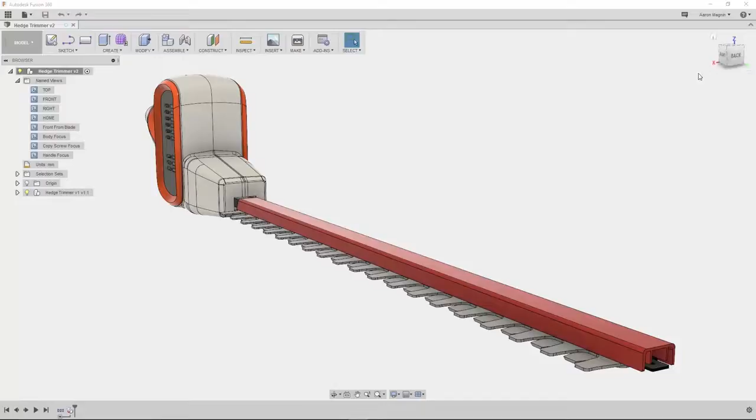January is bringing some amazing stuff to Fusion 360, and as we work along with this hedge trimmer design, we'll show you some of our favorite things. As I use the view cube to adjust the views and get accustomed to the device, you'll probably already notice that the global X, Y, and Z axes are now clearly visible here. This will help immensely because, as you know, directions can get pretty arbitrary pretty fast. With that, let's set out on our design task.

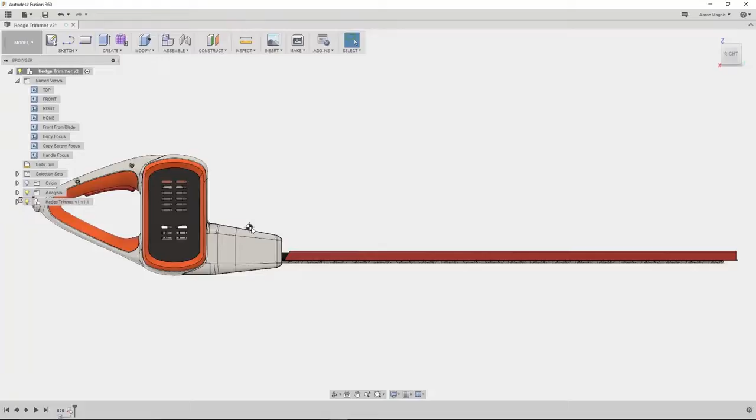And at this stage, we want to ensure the center of mass is located in such a way as to balance it as much as possible. The new center of mass callout should help with that. Once turned on from the inspect dropdown, we'll now visibly see where the center of mass is. Right now it's a little forward for my liking, so let's explore how we can improve the situation. Let's focus on the heaviest of items, the mechanical system.

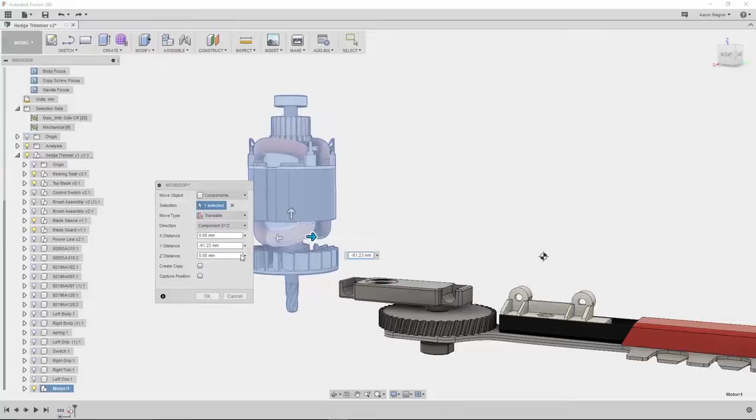What I want to test here is how big a difference moving the motor back might affect the center of gravity location. Accessing the move command, you'll notice a handful of differences. We'll cover these as the video goes on, but for now, we'll select to move the component using a new move type, translate. While we've had the ability to translate from the move command, using this new option helps declutter the manipulators. In addition, I'll leverage another new option here, the toggle to capture the position. This adds a feature in the timeline, making later edits easier.

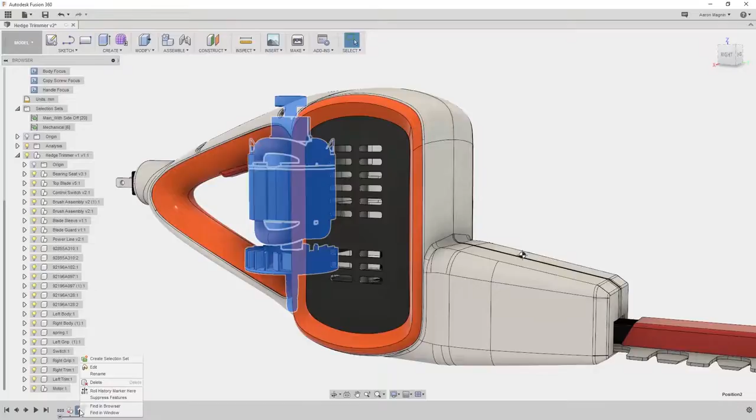As I click OK, turn your attention to the associative center of mass as it updates. As expected, it moves back, but not enough considering all the design changes a move like this would require. So we'll delete the capture position feature to return it from whence it came, and explore another change. The counterweight might have similar effects, and in looking at the handle, I see some prime real estate where we could add one. But to maximize the effects, let's move the ribs to accommodate a larger counterweight.

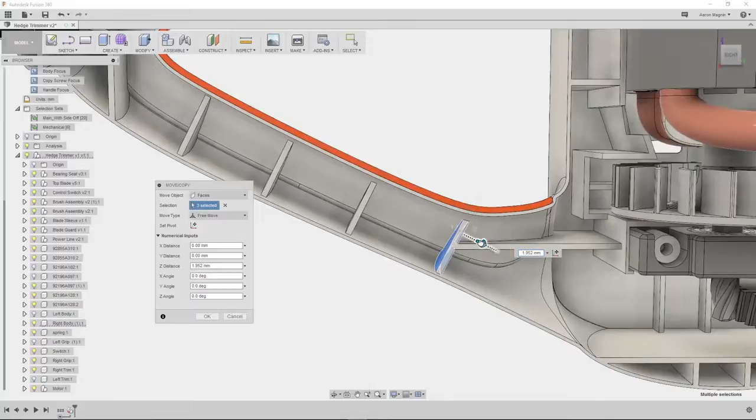I'll pre-select the faces and hit the M key on my keyboard to start the move command again. Because I pre-selected faces, it automatically takes me to one of my favorite new move features, Move Faces. This existed prior, but only when you weren't capturing design history. This new capability will allow me to easily move and rotate these two ribs to my liking, and the best part is that with history turned on, it captures the move in a feature so I can go back and edit it later. Because I don't want the weight to shift during use, I want to make sure it fits snugly against the oddly shaped walls.

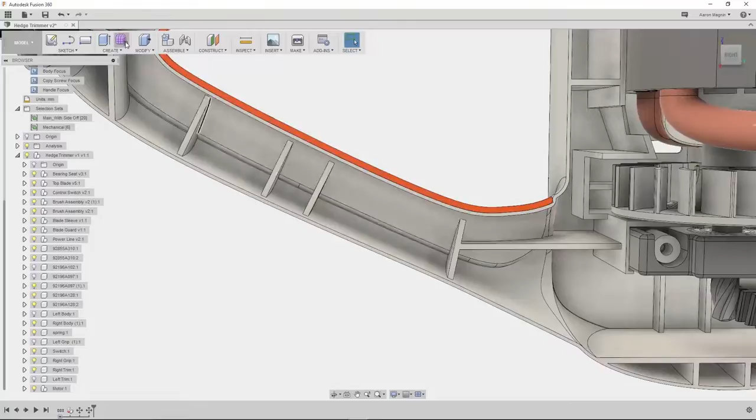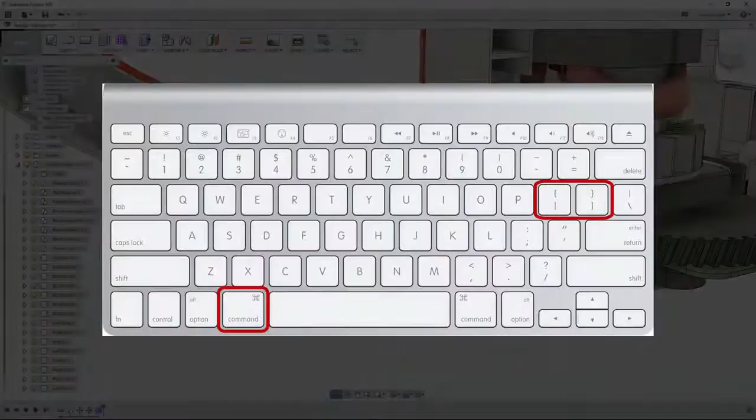To ensure I replicate the walls, let's jump into the sculpt mode and convert these faces. The new convert dialog box feedback makes it clear what input Fusion is expecting. We'll jump ahead to the finished sculpted shape, and now I need to close off the ends and make a solid out of this. To jump to the patch workspace, I'll use the Control or Command bracket key to switch between workspaces. This keyboard shortcut will allow me to stay focused on what matters, my design, rather than digging through those menus. We'll patch both ends and stitch it together to make a solid.

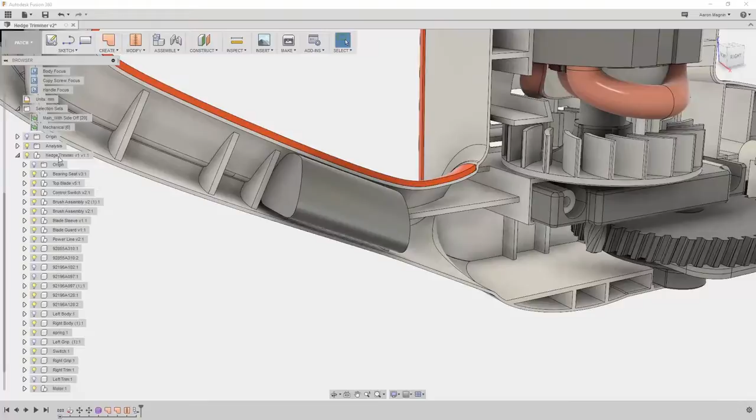Then convert the body to a component. Let's see how effective this is to the center of mass. I'll suppress and unsuppress the counterweight and notice how this improves the balance of the device. If I'm now done with the center of mass, we can turn it off from the analysis folder.

On the front of the hedge trimmer, it appears I'm missing a screw that attaches the blade sleeve to the body. To fix this, let's first measure the distance the new screw will need to be offset from the existing. As I access the measure command by hitting I on my keyboard, you'll see a new option here. It's related to the snap points, which will be on by default. Snap points are all these little guys you see on this face I'm about to select from. While these can be handy when you want them, when you don't want them, they can be quite annoying. Let's turn them off, then continue measuring the distance.

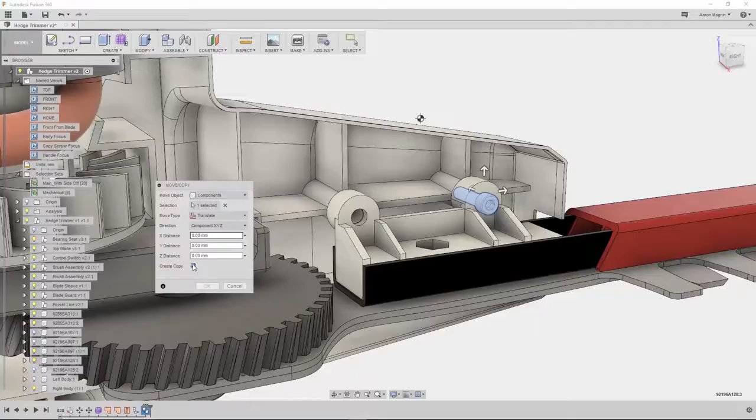35mm is the offset, so let's use that now as we use the move/copy command. I was trying to glance past the new copy part of the tool when I used it earlier. Anyway, I'll select the existing screw, toggle the translate option once again, but this time I want to make sure to toggle on the create copy option before I key in the measured value. This is one of those times the global triad comes in handy.

And although I've highlighted about 10 new options in the move copy command, I still haven't covered all of the new stuff. Check out the always incredible What's New blog by Keqing. You'll be glad you did.

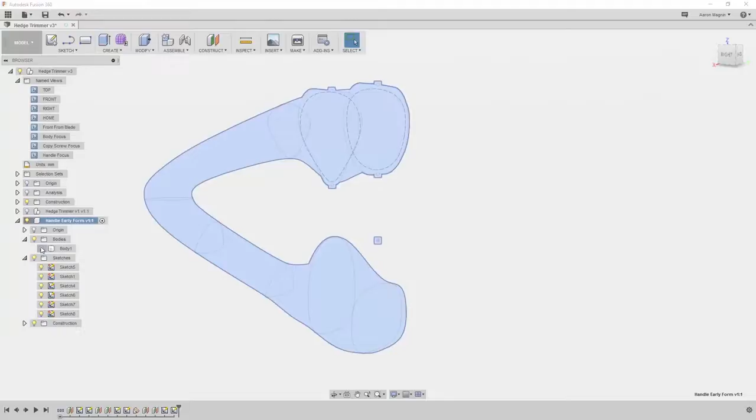This is looking pretty good for now, but let's turn our attention to the handle shape to highlight some other new options. Here I have a model that demonstrates the shape we eventually settled on, because I want to explore some changes. Using Loft to make a shape like this is a great option. When I turn on the Loft, a notable option here is Chain Selection. New to this release is the fact that it will remember the options data as additional Loft features are added.

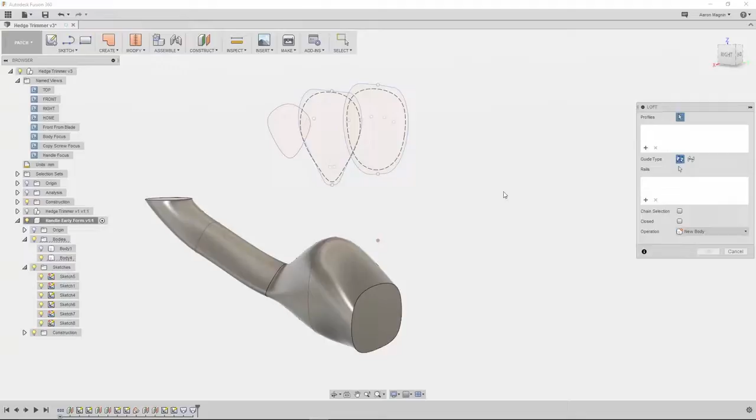This is significantly more important when you go to use a loft in the patch workspace, which again, I'll use the command brackets to switch to. The chain selection option here will, by default, be turned off. This is the more desirable option, as you typically use the patch environment to gain more control over individual faces or items. The next profile I'd like to use is one single entity, however. So let's adjust the sketch to give me more control.

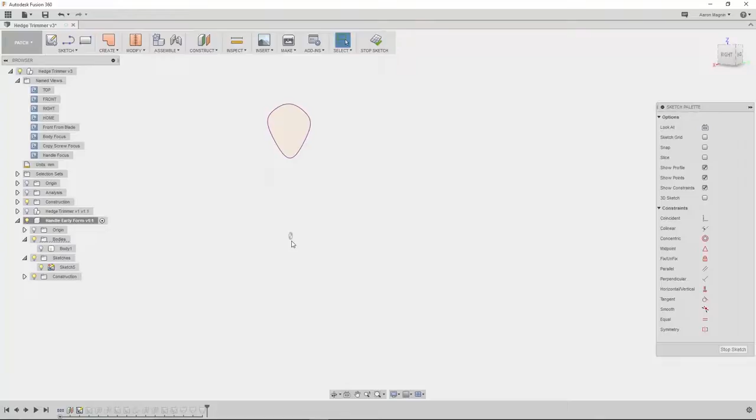As I go to edit the sketch, I want you to note this, the sketch origin, which will always be visible. This is incredibly handy because without it, sketching even a line to intersect the shape would be difficult to locate. With the origin always visible, I can make the end coincident to the sketch origin and that line is properly positioned. These little things can sometimes result in huge improvements. Now, the patch loft can continue.

In this update, we have improved the viewing experience while in work offline mode. Now, while in offline mode, the project and folder structure remains consistent to the look and feel while in online mode. First, Fusion 360 has a period where it will cache files that have been opened locally. These are the files that can be opened while in offline mode. To control the time for this period, go to your name, then Preferences, then change the offline cache time period.

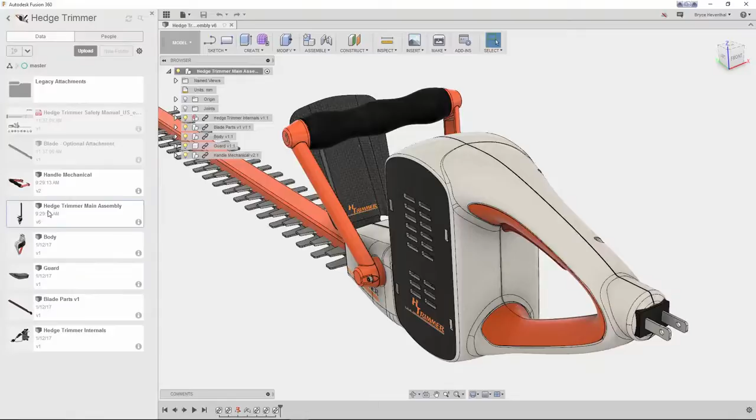Now, when you go offline, you will see the same project and folder structure as if you were online. The main difference is files that are cached locally and can be opened and edited while offline are going to be lit up. Files that are gray are not cached locally. You will have to wait to be back online to open these files. Don't worry, we will be improving the offline experience even further. Make sure to check out the Fusion forecast in the Fusion 360 blog to see what else is coming for work offline mode.

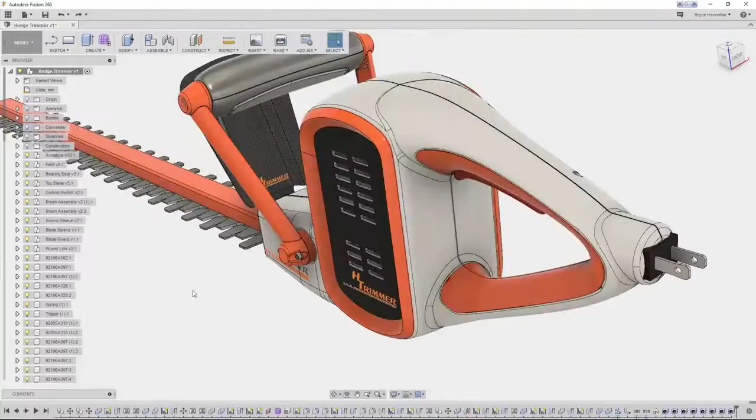Next, in the January update, we have several big enhancements to hit the rendering environment. First, let's open up the Appearance Library. Now, we can search the Appearance Library. This will search the Fusion 360 appearances, My Cloud appearances, and My Favorites.

Speaking of cloud appearances, in this update, we now have cloud appearances. Simply modify any of the appearances in the project and select Copy to My Appearances. The list of My Appearances is sorted just like the Fusion 360 library and is searchable. Now you will be able to sign in to any machine using your Autodesk ID and access your appearances on any device.

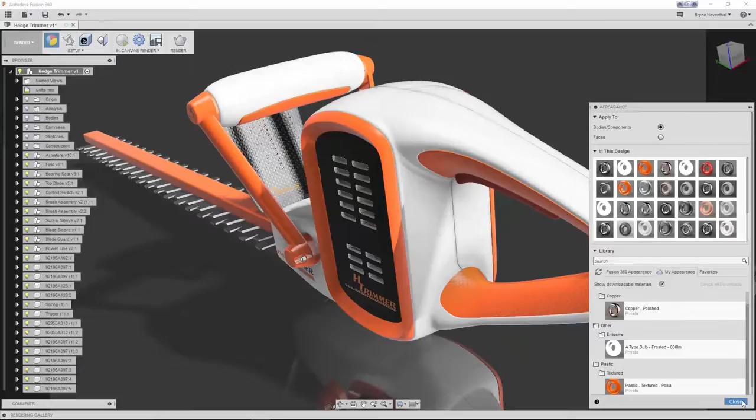Not only did the Appearance Library see some big enhancements, but the in-canvas rendering also saw some major improvements. First, let's start the in-canvas renderer. And notice the bar at the bottom right corner that specifies the elapsed time and number of iterations. Let's open up the settings. There is a new lock view checkbox.

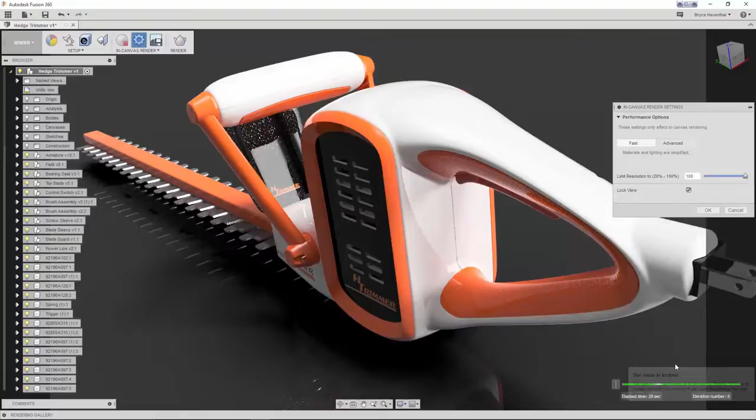Previously, if you accidentally panned, zoomed, or rotated while you were rendering in canvas, it would reset. Now, we can save ourselves from screaming at the screen by locking the view. While the in-canvas render is on, Fusion 360 will not let you change the view. Notice that I'm rendering in fast mode. Let's go ahead and switch to advanced.

Notice the bar at the bottom changes. Finally, the bar at the bottom has different quality settings for excellent, final, and infinite. Use the arrow to place on any of these or anything in between. The renderer will stop once it reaches the specified quality setting.

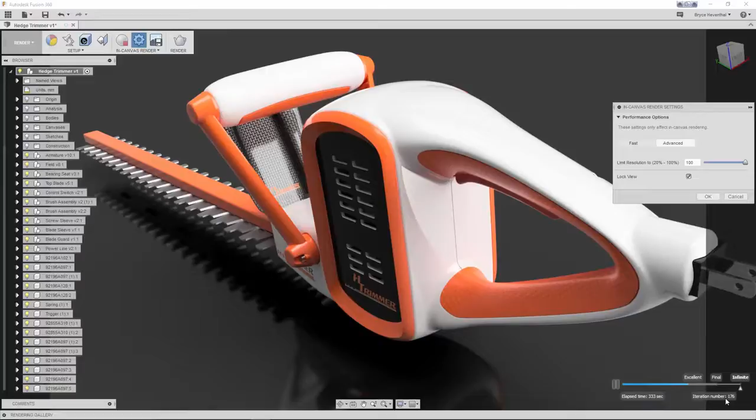Now, let's switch over to some of the nuggets that hit the CAM environment. First, we have added cloud assets. These assets will be stored in the cloud, which means no matter which computer you sign into Fusion 360 on, you will have access to these assets.

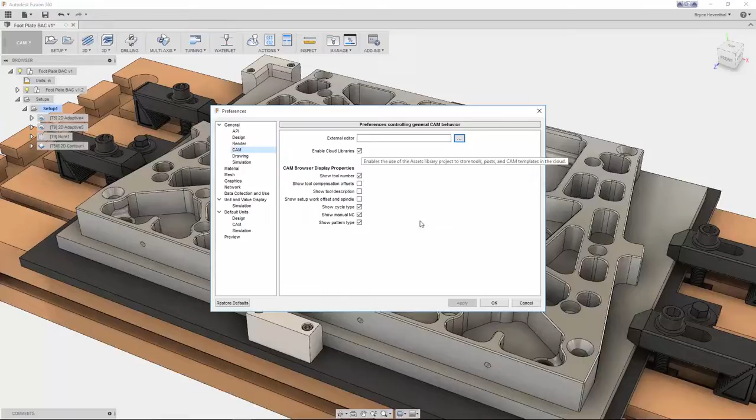Turn them on by going to the Preferences, CAM, and select Enable Cloud Libraries. Now there will be an Assets folder located in the Data panel. Currently, the assets support CAM templates, CAM tool libraries, and CAM posts. Let's start by adding some CAM tool libraries.

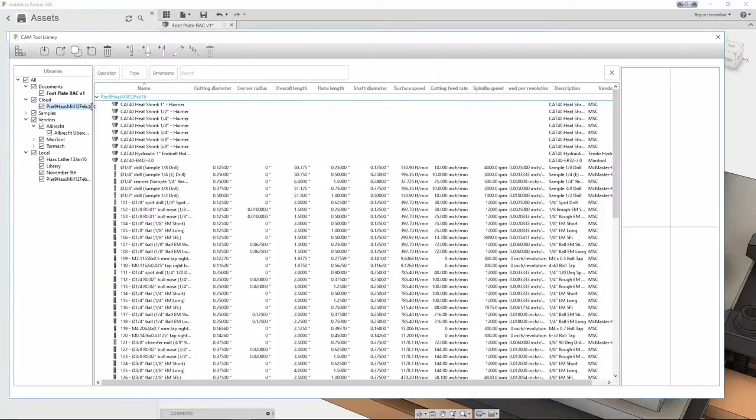I'll go ahead and start by opening up my CAM tool library. There are several ways to add to your assets. Tools that are stored in the cloud library will appear in the assets. One way to add is to import existing libraries into the cloud library. Notice after a refresh that the library is shown in the data panel.

Another way is to create a new library in the cloud library, then add your favorite tools from other libraries into that folder. In addition, we can upload straight into the data panel using the upload button.

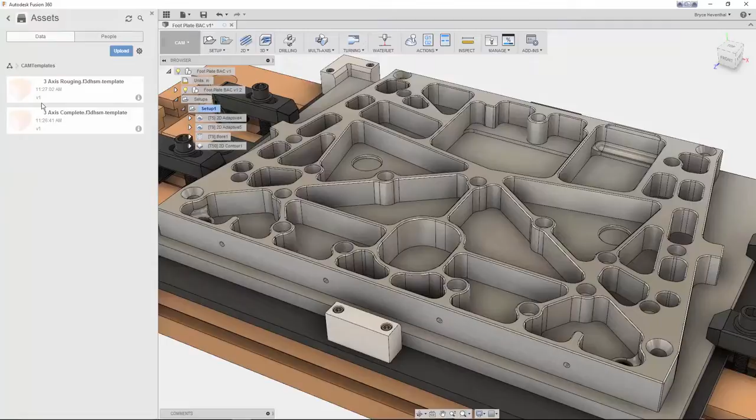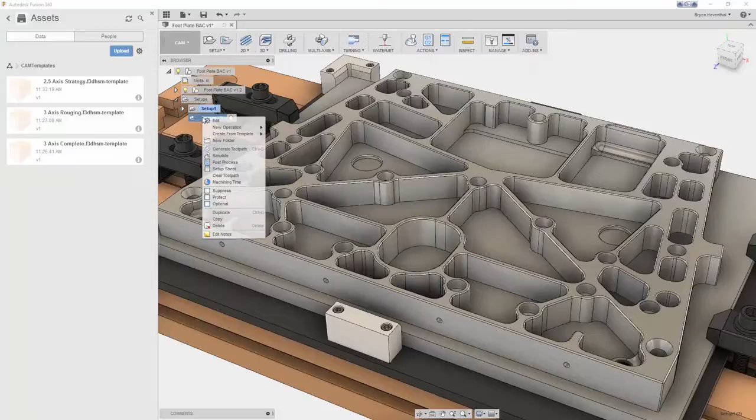Now let's switch over to CAM templates. Now when you create a CAM template, it will be stored in that assets folder. Simply select your favorite collection of toolpaths, right-click, and select Store as Template. Now, no matter what machine you are on, you can use your favorite CAM templates while you are programming your part. The CAM environment is the first place we will be seeing assets being used. But spoiler alert, stay tuned for future updates where maybe other environments take advantage of these cloud assets.

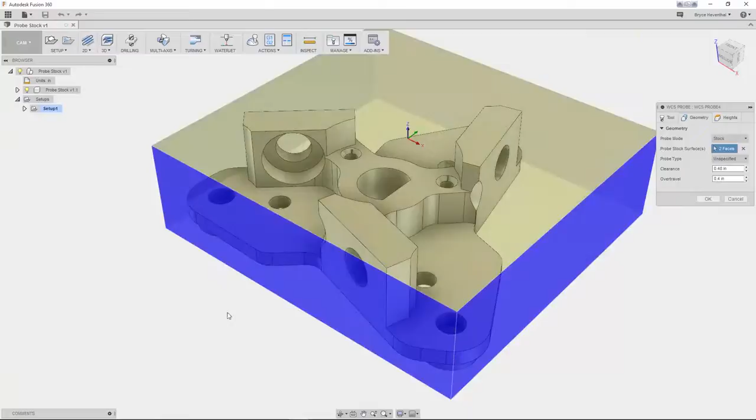Now let's switch gears to some probing. In this update, we can now probe the stock. In this example, we want to probe the center of the stock. Selecting off the model geometry would be difficult to locate the center. Instead, we could switch the probe mode to stock. Now we can select on the yellow stock preview to probe the center of the stock. The probe type will change automatically based off of this selection.

Next, let's create a new probe feature. This time we will use the model probe mode. Let's probe this middle surface. We are trying to locate the surface of this part, but if we machined out this center pocket already, the probe would have nothing to touch off. Instead, let's enable Use Selection Point. This will use the location where I clicked on the surface as the probing location.

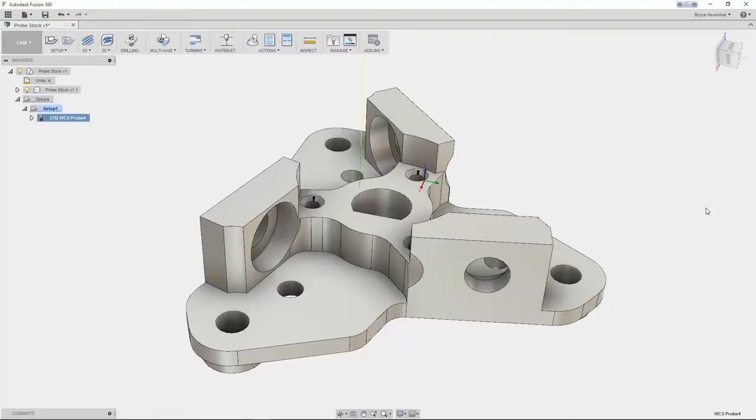Now previously, when creating a drilling operation for several different holes, Fusion 360 has this awesome checkbox to optimize the order of the holes that are being drilled. Well, in this update, we added this optimize order option to the thread, bore, and circular toolpaths.

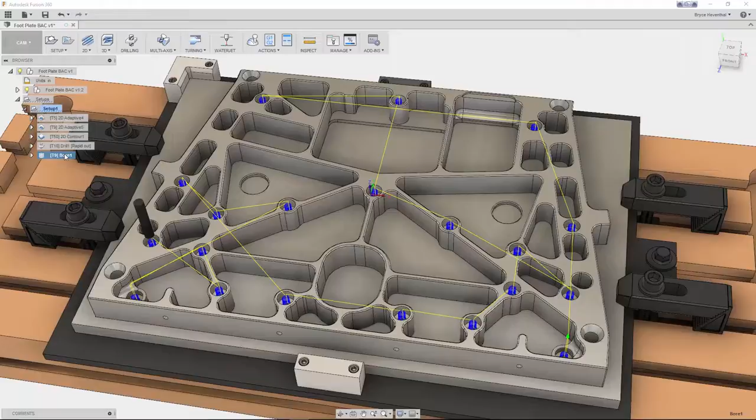Let's take a look at this bore toolpath. Just visually looking at this toolpath, I can see the toolpath crossing itself, which will increase the time and distance of the rapids. Now let's edit the toolpath and select the new Optimize Order option. Now we can see a much better order being used for this bore.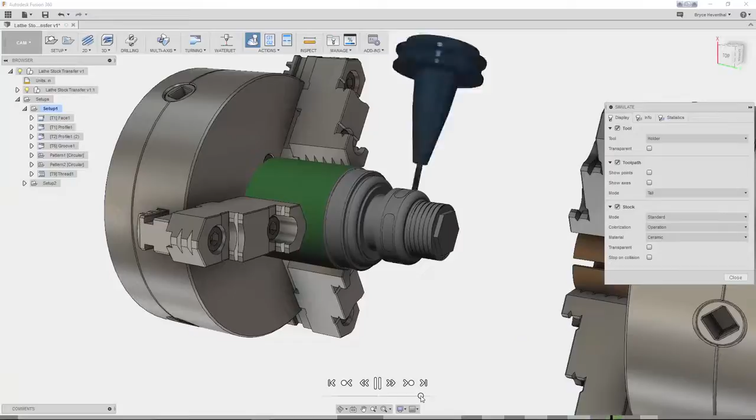Let's switch over to a lathe example. In this update, we now have a new turning secondary spindle chuck and return. This allows you to control the process of passing between the primary spindle and the secondary spindle on a lathe. Let's start by using the turning secondary spindle chuck. Here we get a feed plane, which is how far it's going to wrap it in. And then you get a chuck plane. I'm going to drag it over so it chucks around the thread, right here.

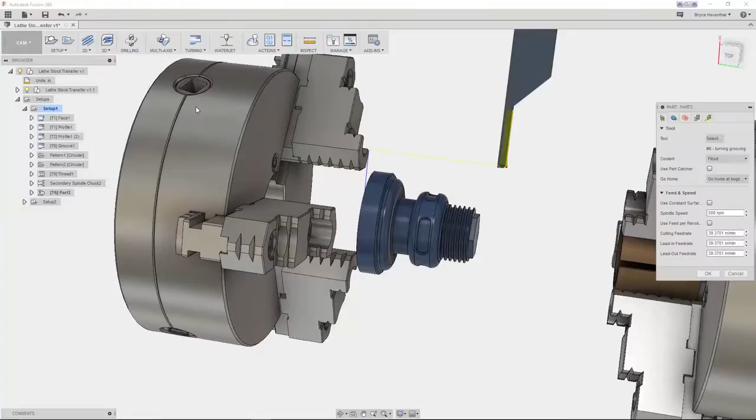Now the secondary spindle will come over and grab the part. Then we can use a parting operation. In the machine, the two spindles will be simultaneously spinning around the part, both holding the stock and the part. The parting operation comes in and cuts the stock off. Then we can use the secondary spindle return and send it back. Finally, we can finish up the backside of this part in the second setup with a facing operation and a groove.

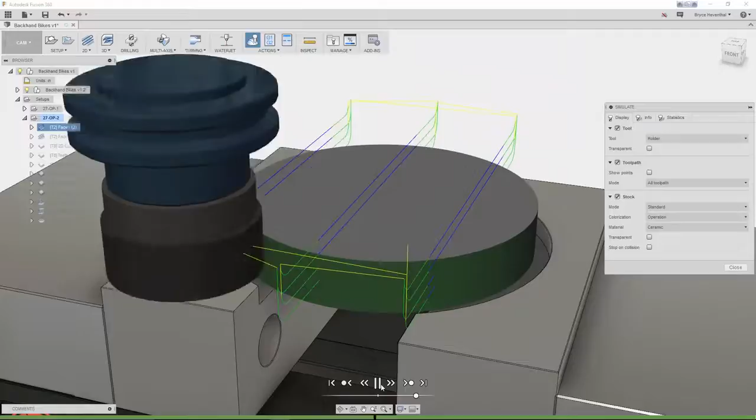Last but not least, we have updated the HSM kernel, which is the backbone of the Fusion 360 CAM environment. Because of this, Fusion 360 toolpaths are more efficient where they start and end. For example, these two facing operations are the exact same, except for the second facing operation, we will enable both sides on the Passes tab.

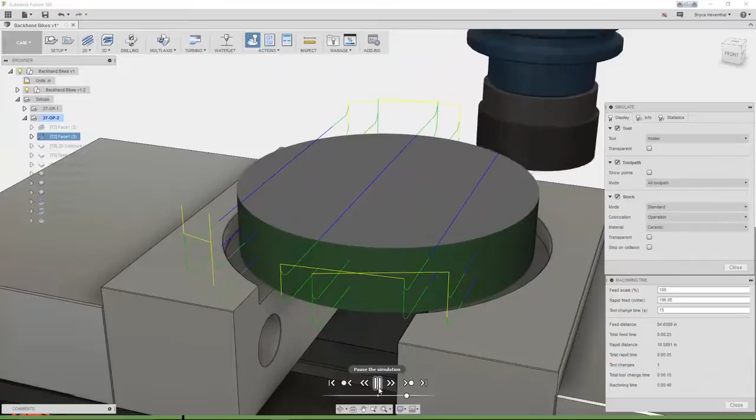Now, if we watch the first simulation without the option enabled, we will see unnecessary rapid movements when the operation steps down the multiple depths. Now let's watch the simulation with the both sides option enabled. Notice as the tool steps down, its lead in is in the same location as the lead out, saving time in rapiding. For this toolpath, this option decreased the machining time by 2 seconds, from 48 seconds to 46 seconds.

Imagine if we were machining thousands of these parts. We would save ourselves precious time. Time equals money, does it not?

Well, that's some great stuff you just showed us, Bryce. I absolutely love that you can search through appearances.

That's going to save me a lot of time, but also the cloud assets, being able to access those from anywhere in the world. I mean, that's the beauty of these cloud tools. Yeah, it's awesome. I have to say, though, my favorite enhancement is the XYZ on the ViewCube.

Love that stuff. Yeah. But now we're going to show you some new technology called branching and merging. This is going to be really useful for those working in collaborative environments. Let's go ahead and check it out right now.

We've been talking branch and merge for some time now, so it's my pleasure to give you a first glance at its capabilities. Let's start with a dive into this by introducing some of the commands and show it in action. You can pretty much sum up all the commands you need to know from this one drop-down. Create branch, create milestone, pull, push, and view project history, which we'll select.

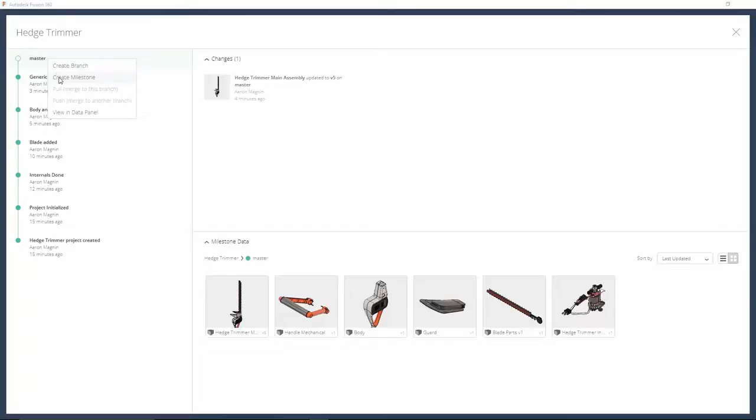When we do, we can see the path the hedge trimmer design took, and along the way the milestones, each designating major changes in the design for organizational purposes. At this point, we're ready to explore some new handle designs, but before we do so, we'll make a new milestone. This can be done from the dropdown as we showed earlier, but doing it from the project history adds some nice clarity. In addition, we'll create some branches from the history view as well. Each branch will allow for exploration of the handle shapes.

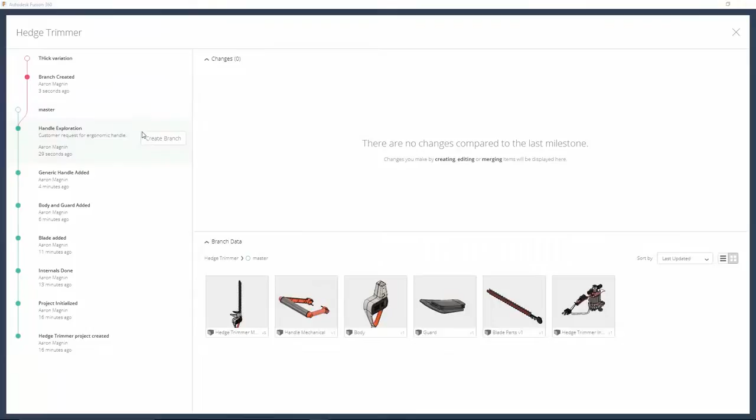An important note is that branching and merging in general is done from the project level, not the individual design level. Because Bryce is part of this project team, he'll get a notification as each branch gets created to ensure the member is privy of the latest developments. Before I start exploring this handle design, I'll first close the history window.

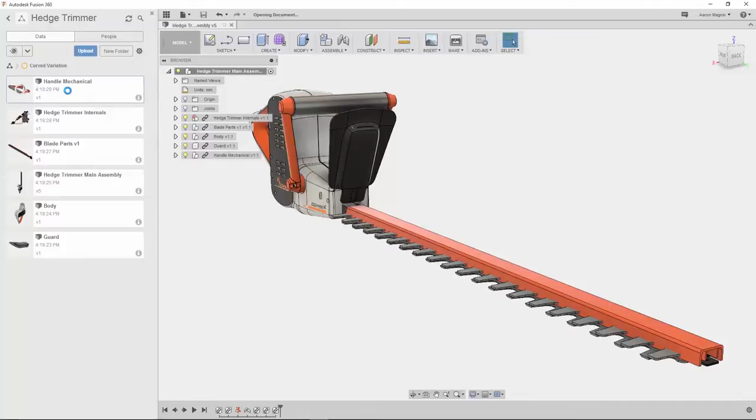And to begin work on what I see as the best design, the Curved Variation, I'll need to activate that branch. To do this, I'll select the project icon and the corresponding branch. Note the color that will not only be present here, but also in the design tabs in Fusion. On each user's computer, the icon will be consistent.

And as we work away on these, it's evident that Bryce is working on the thick branch and I'm working on the curved branch. Being able to have multiple branches going at the same time, stemming from the same milestone, we'll come to a solution in no time. When the winner of this little design challenge is decided, we can look to merge the changes back to the master. The merge can be done in one of two ways, either pushing the changes or pulling the changes. But that mainly depends on what's active.

That said, I'll opt to do this from the project history again, only because I find it to have more clarity. Currently, I'm active on the curve branch, made evident from the highlights in the tree, or the branch data below. On the top, I can see what models differ here from that of the master. If I click to change to the thick variation, I'll see the same, but only for this version of the design.

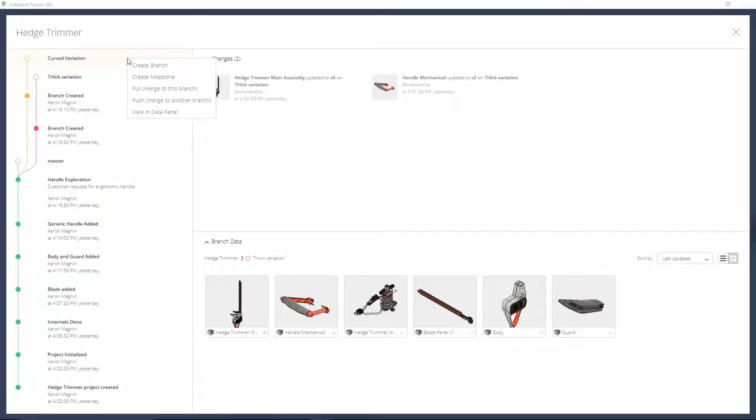It's been decided, however, that the curve variation is the one we want to move forward with, so we'll right-click on that milestone from the branch and select to push the changes from that branch to the master. From the next dialog, I'll select to merge the main assembly and the handle from the curve branch to that of the master. It's a good idea to add a summary and description for organizational purposes.

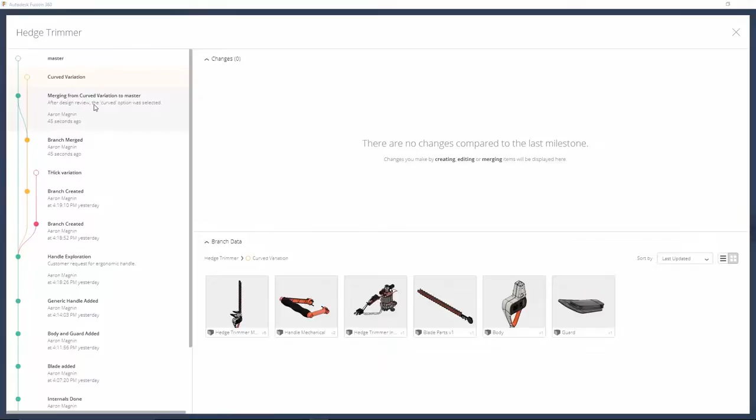And when it finishes, you can see the changes in the tree, and although the changes were moved from the curve branch, it still continues in case other downstream edits are needed. I'll open up the master branch main assembly, and the nice new handle is visible here. With branching and merging, you can explore design variations without consequence and manage changes like a pro.

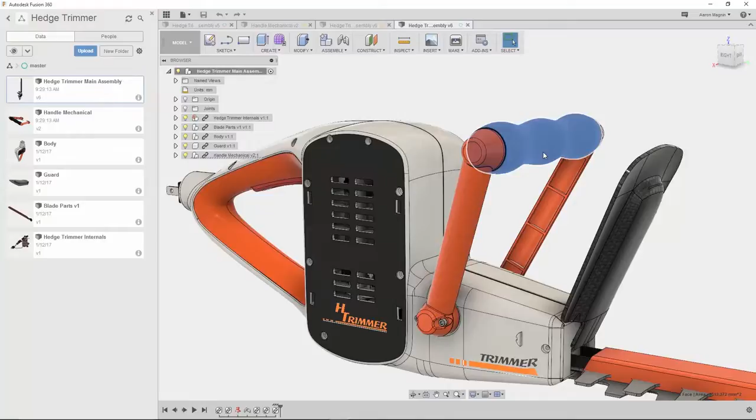You can be sure we're building tons of learning content to support branch and merge. Until you're fully confident with this tool, I'd recommend you create a couple test projects to try it out on. Man, branching and merging is going to open up some capabilities for team and collaboration environments. But I'd recommend opening up a project and doing some trial and error with it.

It's going to take some getting used to, but it's going to open up a lot of capabilities in the long run. Yeah, good call on that. Good to get to know it before you start implementing it in your day-to-day.